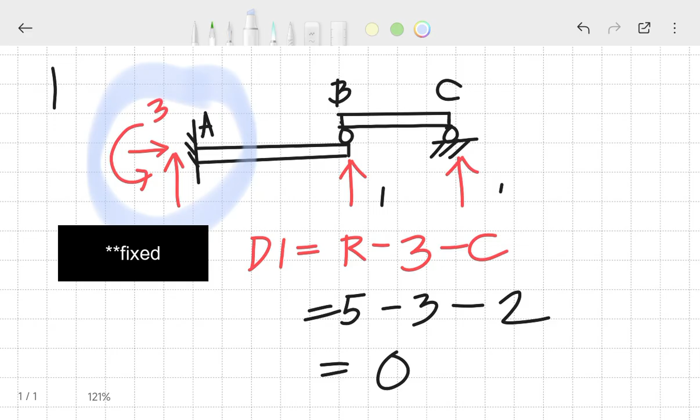So this is practice problem number 1. We have here a fixed connection. At the fixed support, there are three reactions because there's X, Y, and moment. At B, we have an internal roller, with one vertical reaction. Then at C, we have another vertical reaction.

If we apply the formula for the degree of determinacy, that should be R minus 3 minus C. Our R is a total of 3, 4, and 5, so that's 5. This remains 3. And the C for an internal roller remains at 2. Please verify that in the table. So 5 minus 3 minus 2 equals 0.

So based on the degree of determinacy, you can say it's determinate. It can be solved using equilibrium equations. But is it stable or unstable? Based on our own understanding of the figure, actually this is an unstable structure. How do we know if it's stable or unstable?

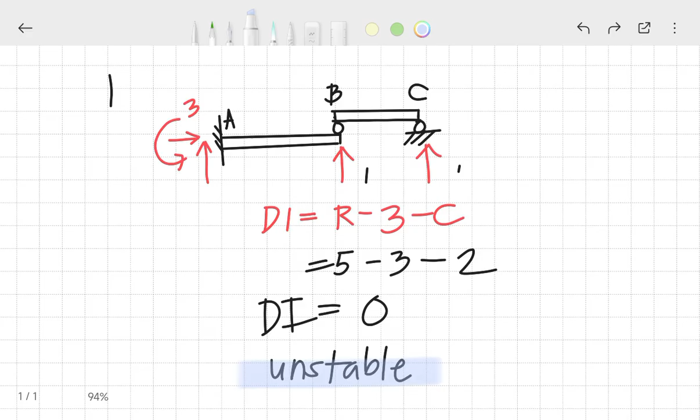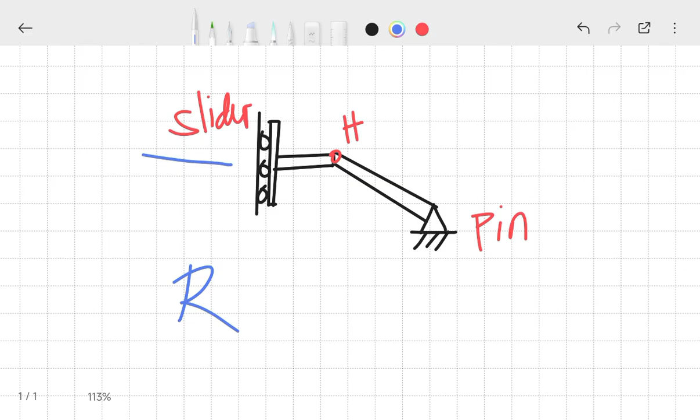So for the next structure, we have a connection of a slider hinge to a pin along the side. If we count the external reactions, for the slider there are always two - one like this, then one moment. So two. At the pin, we also have vertical and horizontal reaction, so two as well. Total of 4 for our R.

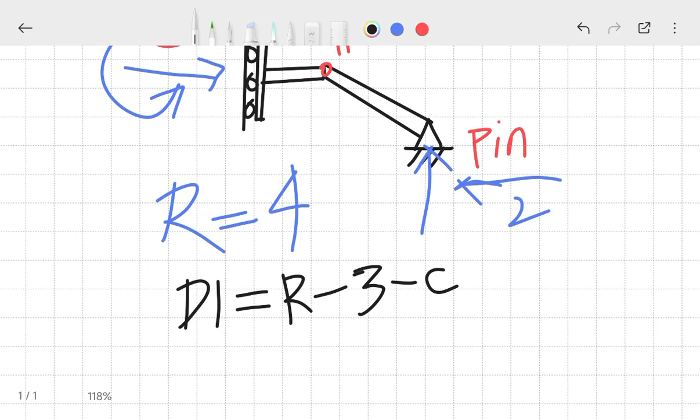What's the formula again? R minus 3 minus C. There's still C, which comes from internal reactions. The C, or the number of releases for a hinge connection, please refer to the table, that is equal to 1. If we put in the given: 4 minus 3 minus 1, that's 4 minus 3 minus 1 equals 0. Or you can say that is a statically determinate structure.

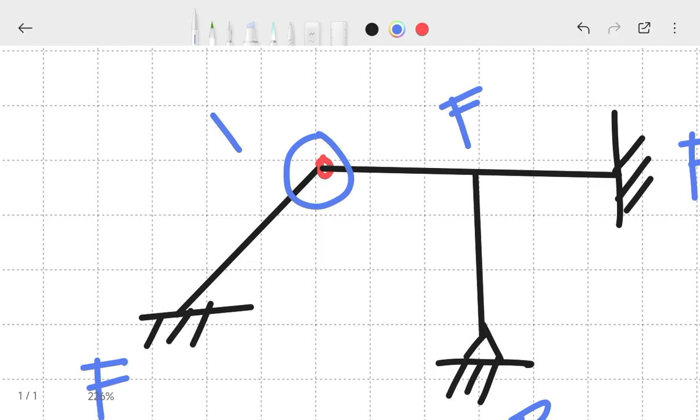Okay, so with these internal and external reactions, let's count the total. For external, we have fixed: 1, 2, and 3 (marked in red). So we have 3 here. External pin, so two. Then fixed again, so three. So R total is 3, 6, 7, 8.

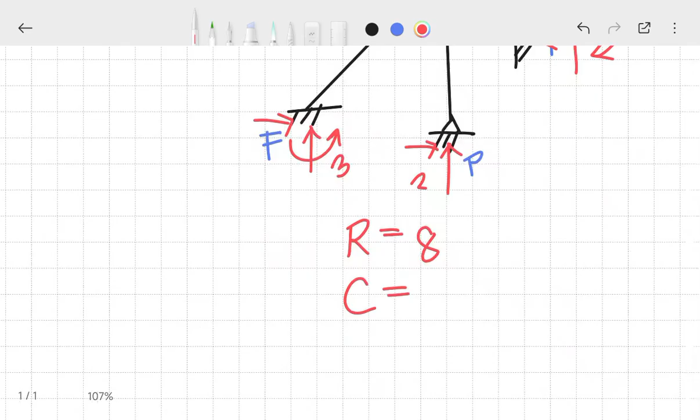C po natin, we have an internal hinge. So ang hinge is may 1 na C. Tapos yung para sa fix, wait, refer ko dun sa table, wala siyang releases, so total mo lang dyan sa row. Kaya pag lagyan natin siya dun sa DI, magiging R minus 3 minus C, equal sa 8 minus 3 minus 1, tama ba? Or 8 minus 4, that's 4. So meron pa pong 4 degree of indeterminacy, statically indeterminate up to the 4th degree, since mas mataas po yung nakuha natin.

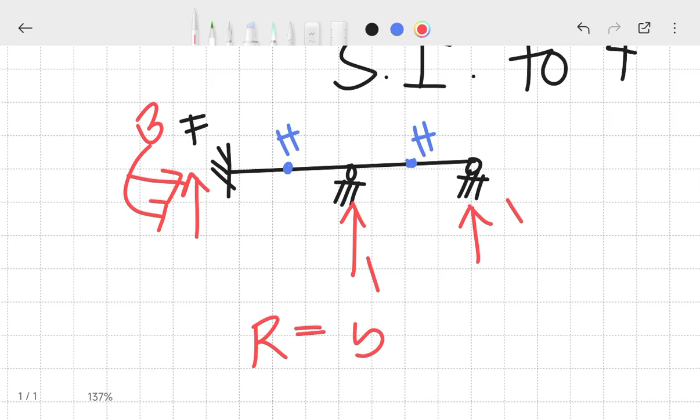Tapos meron po siyang internal hinge sa gitna-gitna, may hinge na dito, may hinge ka rin dito. So kung i-analyze po natin, reactions na muna: 1, 2, and 3, so we have 3 reactions. We have 1 reaction sa roller, 1 din dito, so total of R is equal to 3, 4, and 5. Yung C po natin, dahil meron po tayong hinge, ang C po ba ganyan, lagi namang 1, so 1 and 2. So sa kaso na yan, pwede na tayo maglagay ng formula DI equals R minus 3 minus C. R po natin, 5. 5 minus 3 minus 2, or 5 minus 5, 0.

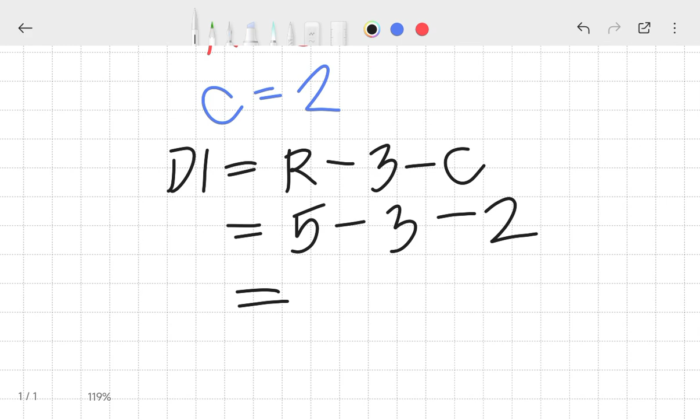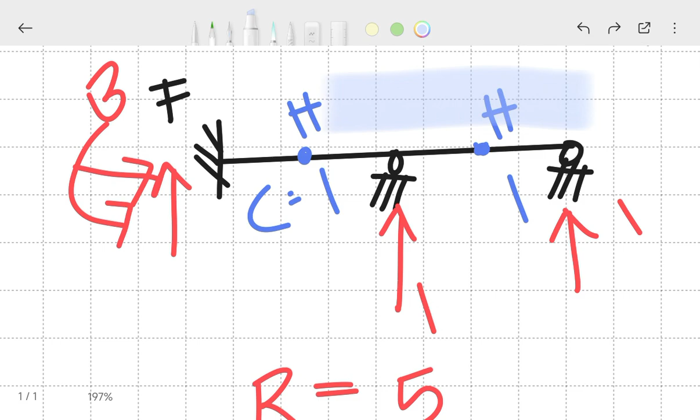Kung nag-0, ibig sabihin that is statically determinate, or SD. Kung i-analyze mo po, maayos naman po yung pagkakakabit ng mga suporta dito sa ating beam, sapagkat meron naman siyang sumusuporta dito, naka-fix. Kaya kahit mag-slide down tong mga roller na to, hindi siya mawawala sa pwesto. Kaya statically determinate po, at masosolve po siya using equilibrium equations.

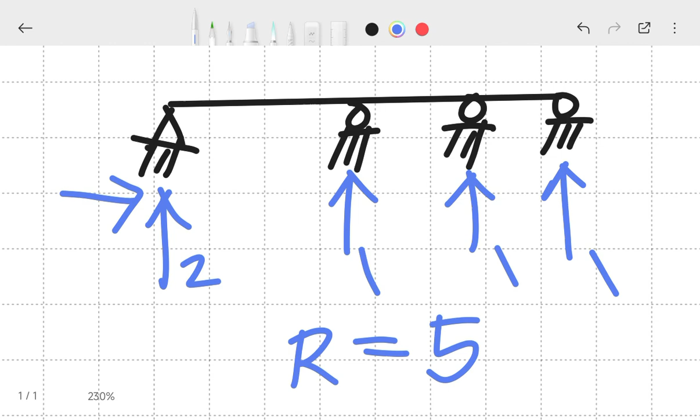Ito naman, so meron tayo ditong continuous beam na merong pin, so dalawa ang reaction mo dyan. Tapos roller, roller, and roller, so total, tigi-isa, ang reactions po natin ay 2, 3, 4, 5. Do we have an internal hinge? Wala naman siyang sinabi na internal may hinge sa pagitan, kaya wala po tayong consider na releases. So C po dyan equals sa 0.

So pag nilagay natin nun sa formula, DI equals R minus 3 minus C. Magiging 5, tama ba? 5 minus 3 minus 0. So 5 minus 3 is 2 degree, so meron pa rin po siyang indeterminacy na 2 degrees. So pwede pong masabi na statically indeterminate po siya up to 2 degrees. Yan po ang kasagutan sa problem na iyan.

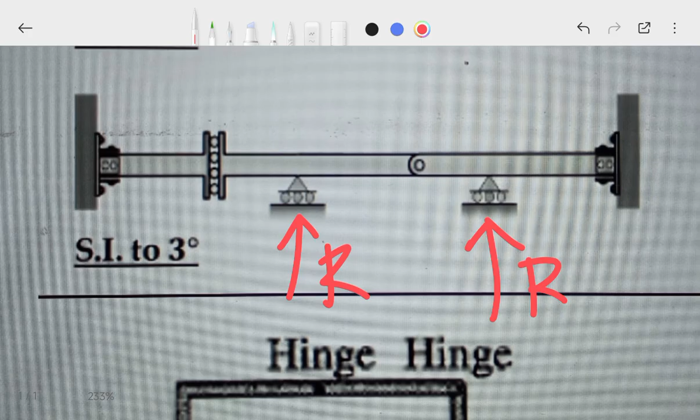Next na po natin, ito po, so for this particular problem, in-screenshot ko siya kasi medyo complicated yung figure. But as you can see, that is a continuous beam with so many connections. Nakakaloka. Unahin natin yung external, so ang assumption ko dito, ito, roller ito. Oo, malamang roller man talaga yan. So ilan ang total reactions niyan?

Tig-isa. Okay, tapos ito, ang assumption natin, fixed siya, no? So pag fix, tatlo dapat ang reaction. Bakit fixed? Kasi pag titignan mo, nakabultahin naman siya dito, tapos ano din siya dyan, so fixed yung connection. So we have here 1, 2, and 3, tama ba? Tatlo, isa. Tapos dito din, tatlo din, kasi fixed din yung assumption natin. So for a total of R: 3, 4, 5, 6, 7, 8.

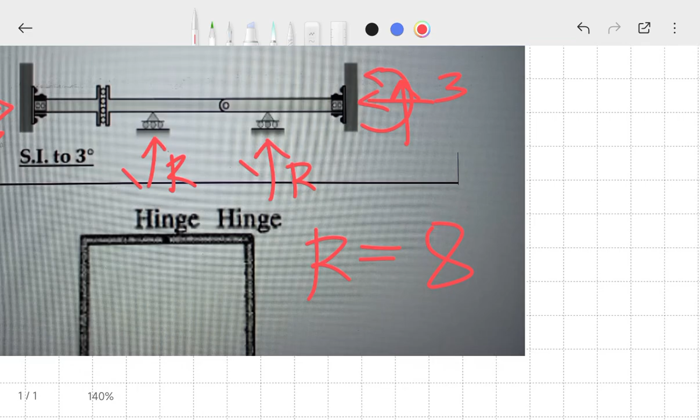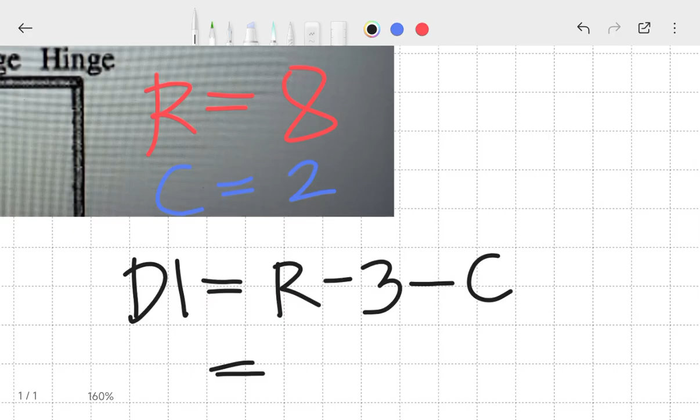8 yung R. Sa C naman po, makikita natin sa internal reactions. Ang internal po ng slider, paki-refer po sa table po natin, ang slider po ay mayroong internal na C equal to 1. Tapos ang hinge is C equal to 1 din, so total of 2, C is 2. So pag nilagay na natin siya sa formula ni DI, magiging R minus 3 minus C, so that is equal to 8 minus 3 minus 2, ilan? 8 minus 3, 5 minus 2, 3. Okay, so 3 degree po yung indeterminacy niya, which is nandun sa module, yun sa dual. SI po siya to the 3rd degree.

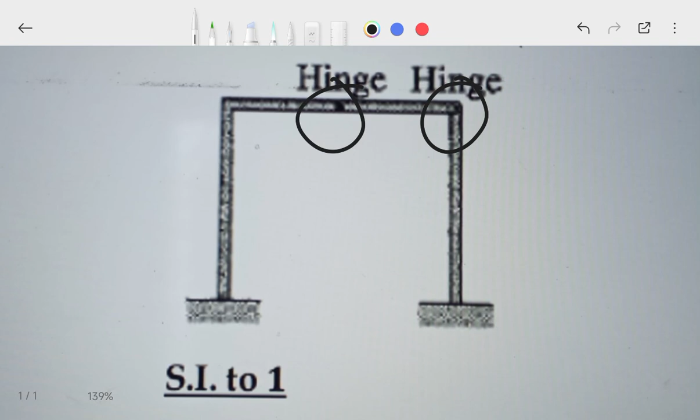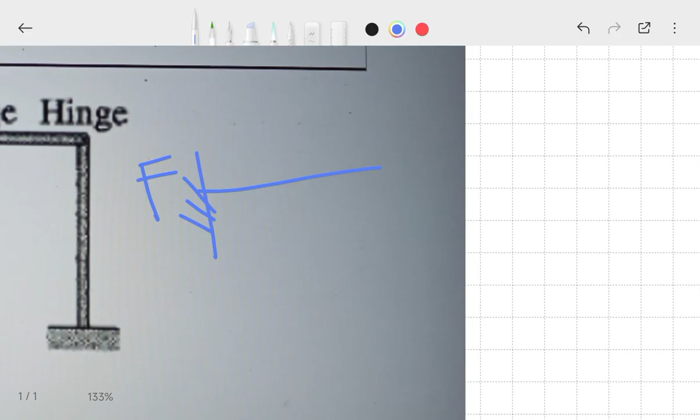Itong next problem po natin, meron tayong fixed na frame, fixed kasi ito, no? Tapos meron po siyang internal hinges along this, tapos ito pa pala, that is fixed. Diba, ang analysis natin sa frame, para lang din natin yung pinapahiga, so beam, kasi as you can see, meron siyang 1, 2, and 3, tatlong sangay. So kung gagawin mo siyang horizontal lahat, so ito yung fix, tapos ito yung first part, tapos fix din siya dyan, or something. Tapos bali dito sa gitna, magkakaroon pa siya dyan ng hinge, tapos dito may hinge, tapos fix na yung dulo. Ganyan bagang analysis natin sa mga internal reaction ng frames. But okay, anyway.

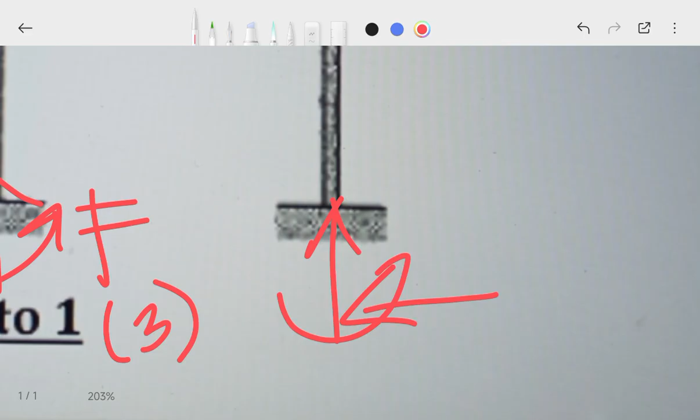If we count externally the number of reactions, here we have three because there's a fixed moment. So it should be 3. Then over here also fixed, so 1, 2, and 3. So fixed, three. How about the external total? So R total is 6.

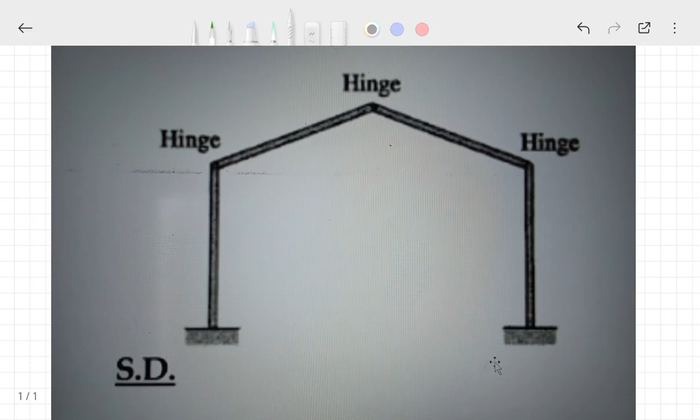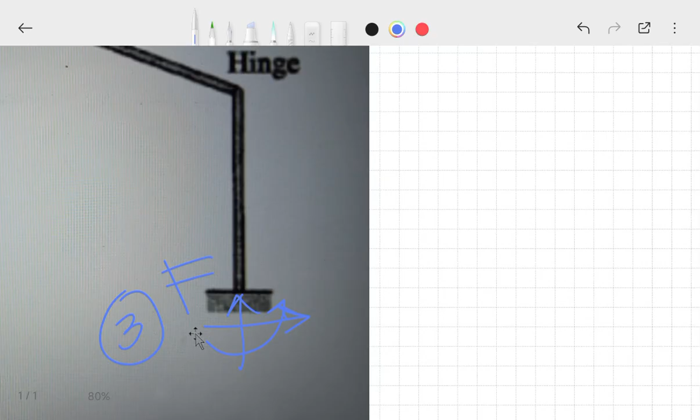For our next problem, we have another frame system that is fixed at the bottom, as you can see here. Then here, also fixed. Then it has three internal hinges inside. Let's do the external first. So it's fixed, so we have, in blue, three external reactions for a fixed connection: 3. Then here, also fixed on the other side, so 1, 2, and 3. Total of three as well. If we sum it up, we have R equals 6 for external.

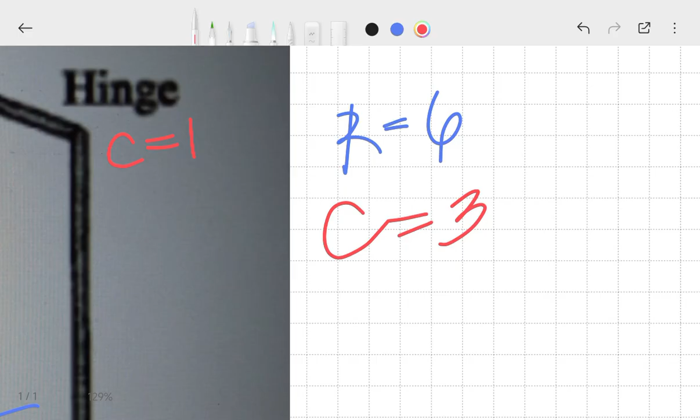How about the internal? So internal, we have hinges. How many hinges again for C? So 1 C for the hinge. At C, 1 again. Then here too, we still have C equals 1. So total of C's, we have 1, 2, and 3. So let's apply to DI: R minus 3 minus C. So that should be 6 minus 3 minus 3, or 6 minus 6 equals 0.

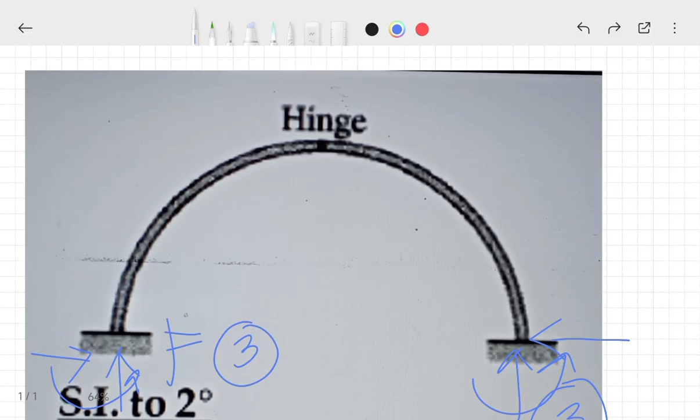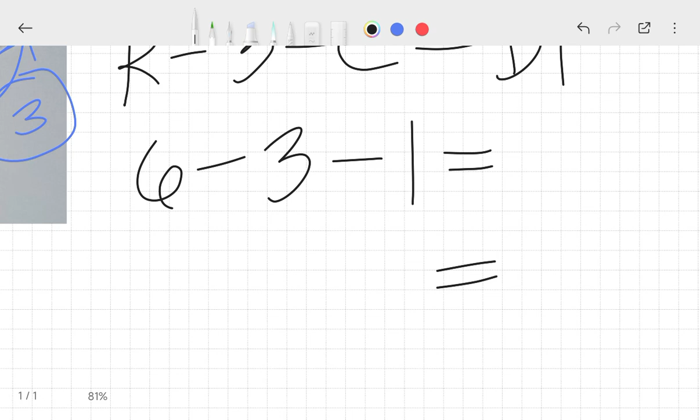Okay, so total R, that should be 6. Total C, 1. So R minus 3 minus C, that is our degree of indeterminacy. We have 6 minus 3 minus 1, or 2 DI. So 6 minus 3, that's 3. Minus 1 more, so 2. Right? 2 degrees of indeterminacy.

So therefore, this structure is statically indeterminate, 2 degrees only. Which is evident because it's indicated in the problem itself. You can follow along.

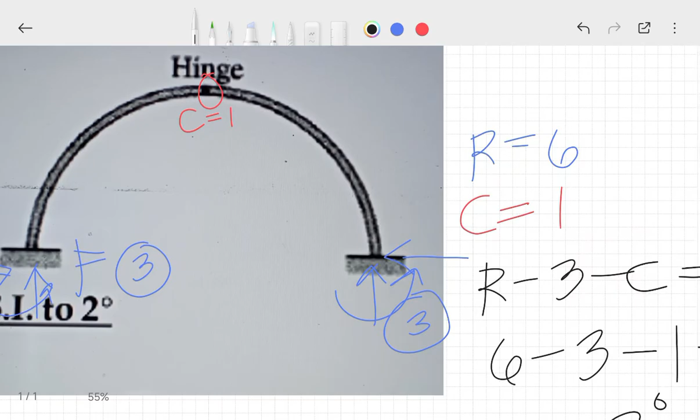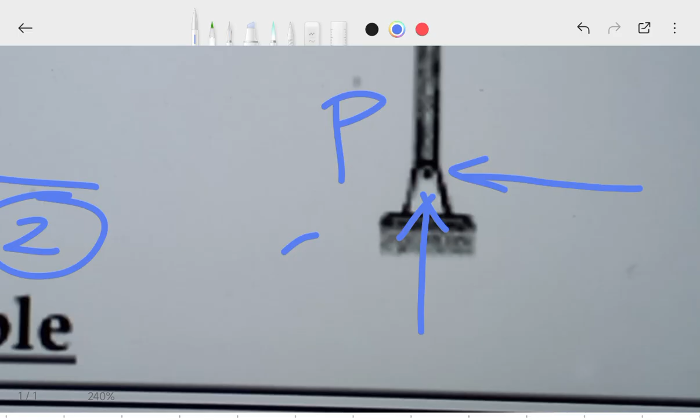For this problem, we have a frame system supported by a pin connection here at the bottom. So if it's a pin, then you have two reactions there. Same here, because it's also a pin. A total of 2. So our total reaction, 2 plus 2, 4.

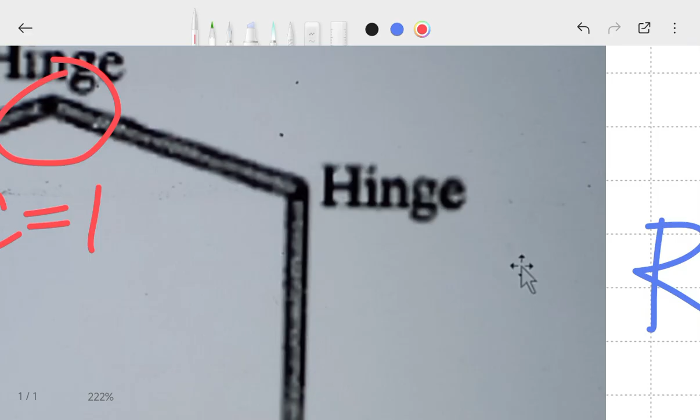So when we plug it into the indeterminacy formula, R minus 3 minus C, how much is R? 4 minus 3 minus 2. So that is negative 1. So negative. Our determinacy became negative.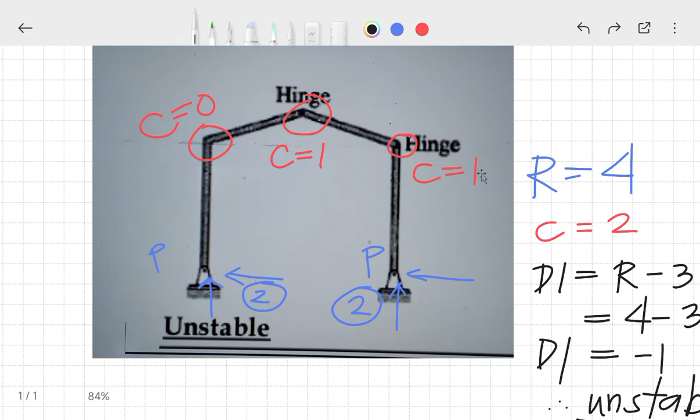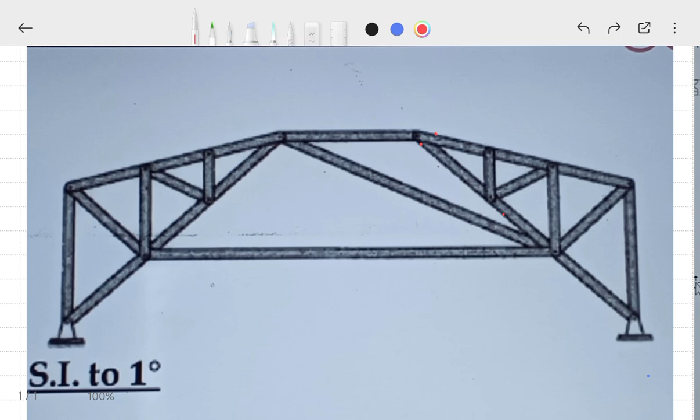For this problem, we have a truss system supported by a pin connection and connected by several hinges along the frames. Let's analyze by first looking at the external reactions. Since this is a pin, there are two reactions on the left and two on the right, since it's a pin connection.

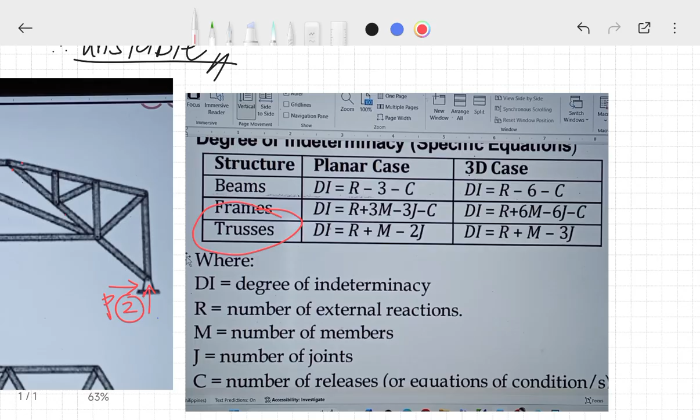Take note, the formula for degree of indeterminacy is slightly different here. For beams, we use R and C, and for frames, we use a similar method. So the formulas are almost synonymous. However, for trusses, the formula we follow is DI equals R plus M minus 2J. R is still the reactions, M is the number of members, and J is the number of joints. That's what's added.

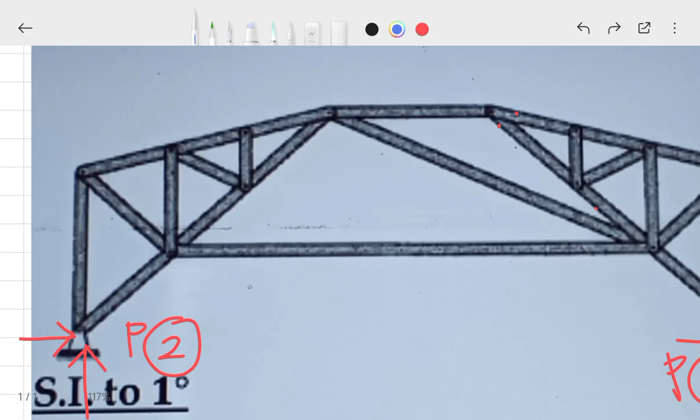For the number of members, we have no choice but to count them one by one. Counting: 1, 2, 3, 4, 5, 6, 7, 8, 9, 10, 11, 12, 13, 14, 15, 16, 17, 18, 19, 20, 21, 22, 23, 24, and 25. So our M is 25.

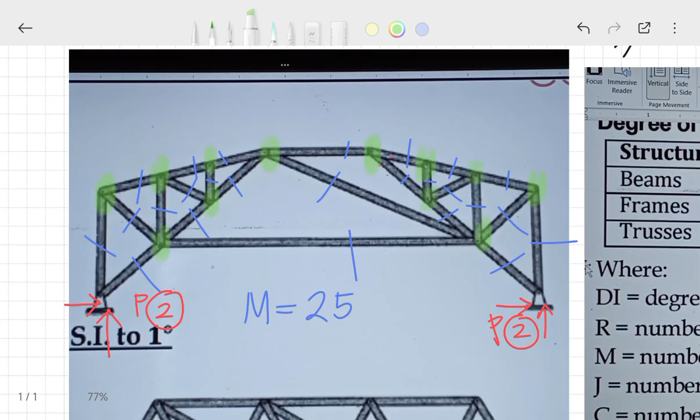Then for J, the number of joints, let me change the color. Let's count: 1, 2, 3, 4, 5, 6, 7, 8, 9, 10, 11, 12. Is this included in the count? Let's assume it is for now. 13 and 14. So for joints, we have J equal to 14.

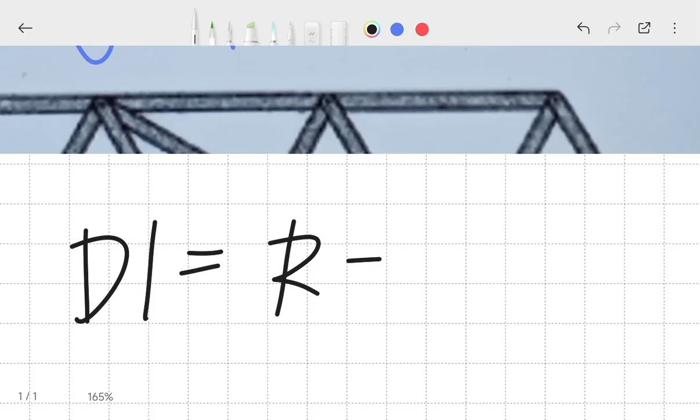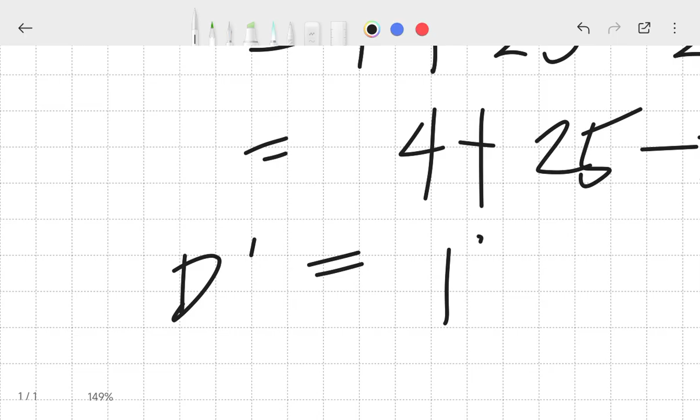Let's try it, trial and error. DI equals R plus M minus 2J. This is the formula we'll use. We have reactions equal to 4, plus M which is 25, minus 2 times J which is 14. Using the calculator, that's 29 minus 28, which equals 1. There's an excess of one, so the degree of indeterminacy is statically indeterminate to 1 degree.

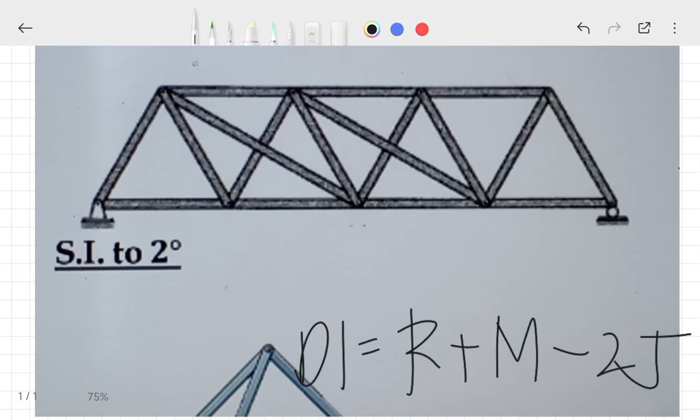For this problem, still trusses, but as you can see, it's simply supported. Let's start with the reactions so it's faster. You have a pin connection, so two reactions there. Then on the other side, this is a roller, so one reaction there. So the total R is 3.

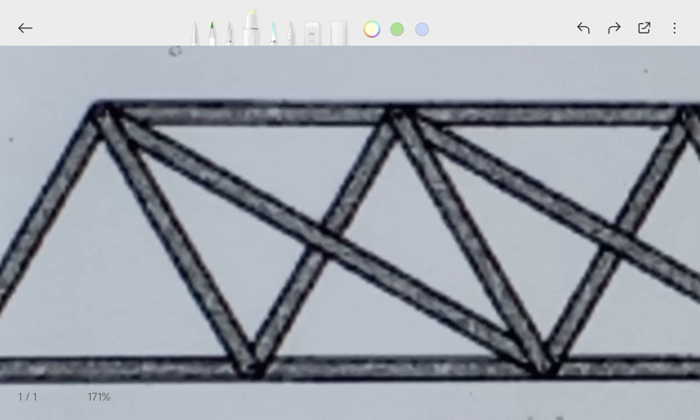Okay, let's count one by one: 1, 2, 3, 4, 5, 6, 7, 8, 9, 10, 11, 12, 13, 14, 15, 16, and 17. So there's a total of 17 members. M equals 17. Then how many joints?

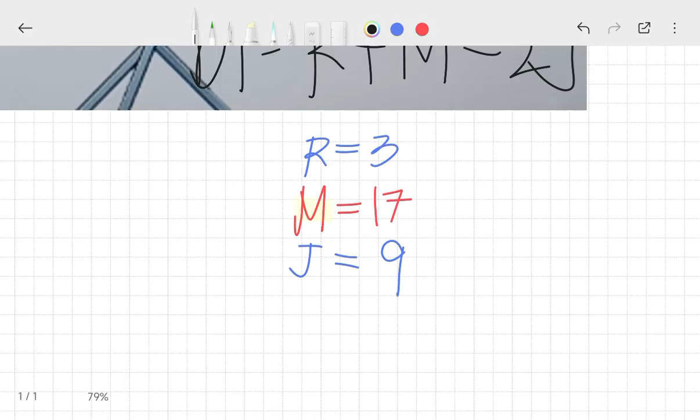Applying this to DI: R plus M is 3 plus 17, minus 2 times 9. Mathematically, that's 20 minus 18, so the result is 2. So it's still statically indeterminate, up to 2 degrees only. That's correct, so that's the solution.

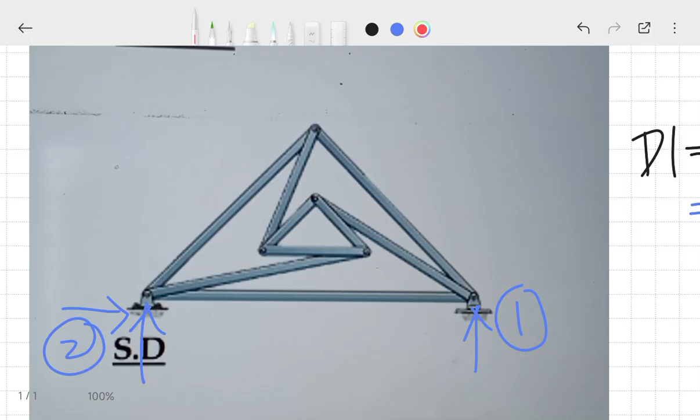Is that correct? And how about the joints? Let's count: 1, 2, 3, 4, 5, and 6. Just 6? That's correct, right? Just 6, so it's 6.

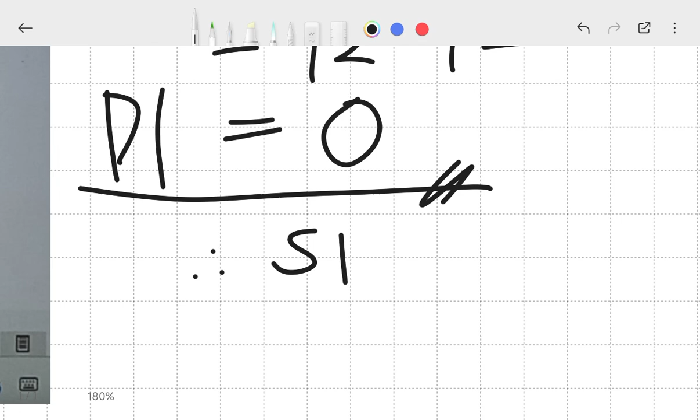Minus 2 times 6. So the total becomes 9 plus 3 is 12... minus 12. That's perfect, so the DI equals 0. Therefore, that is statically determinate, which matches the expected SD answer. Okay, so yeah, right?

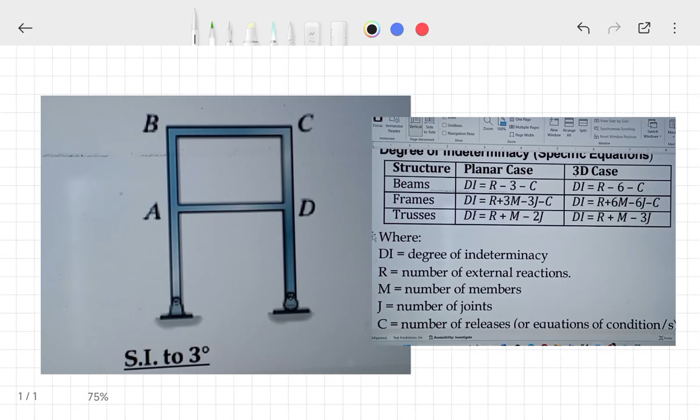Ito naman po, frames, no? Kasi combination na siya ng vertical and lateral. Ayan, so ang gagamitan natin formula, paano ba yan? Overlap ba yung edge? Ayan, buksan ko lang.

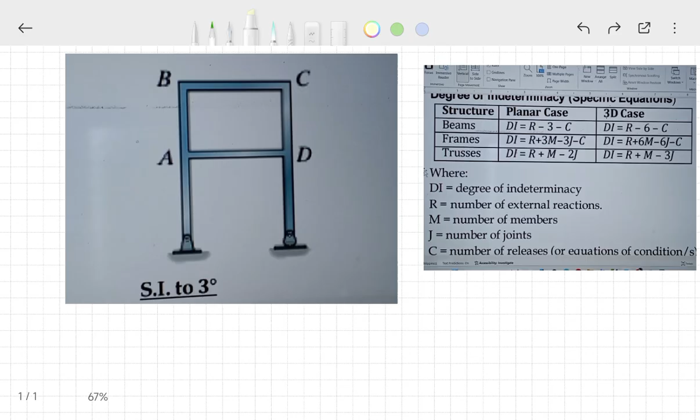Ito po ang gagamitan natin na formula for frames: DI equal to 3M plus R minus 3J minus C. So kagaya lang din sa trusses, bibilangin lang natin dyan yung number of members, number of joints. Pero combination na siya nung nasa beam, na mahanap tayo ng releases, the equations of conditions, okay, for the internal reaction. Sige, madali lang naman yun, para lang combination ng beams and trusses all over again.

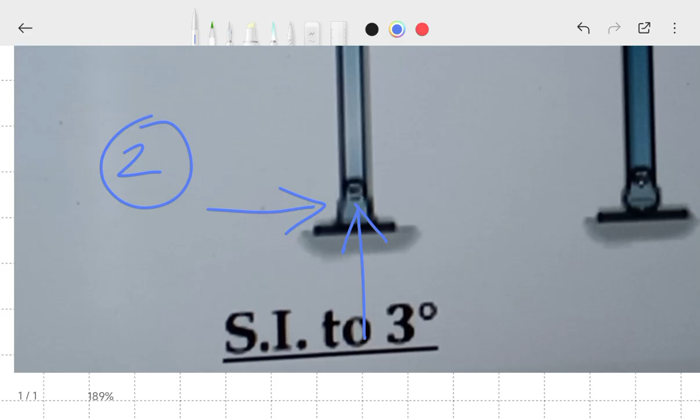So sa reactions po, unahin na natin yung medyo madali-dali. So this is pin connection, so meron tayo dyang dalawa. Tapos dito, rocker, so rock and roll, isa. Total R,

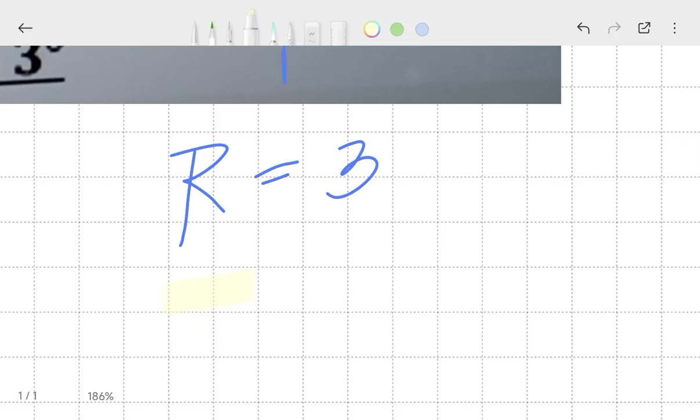3. Then ang panggamit natin, M, number of members. So paano ba natin ito bibilangin? I think we will have an assumption. Ito yung ground floor, so member 1, 2, 3, 4, 5, and 6. Tama? So sa members po, gawin na po natin sila 6. Then for the number of joints, so kung nasaan nag-intersect yung mga members na yon, so 1, 2, 3, 4, 5, and 6. So sa number of joints, 6.

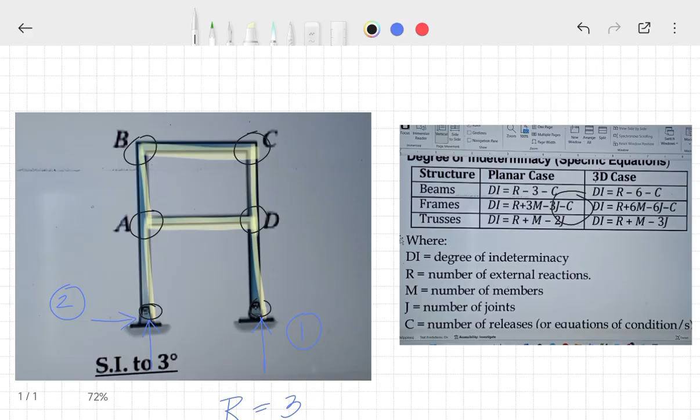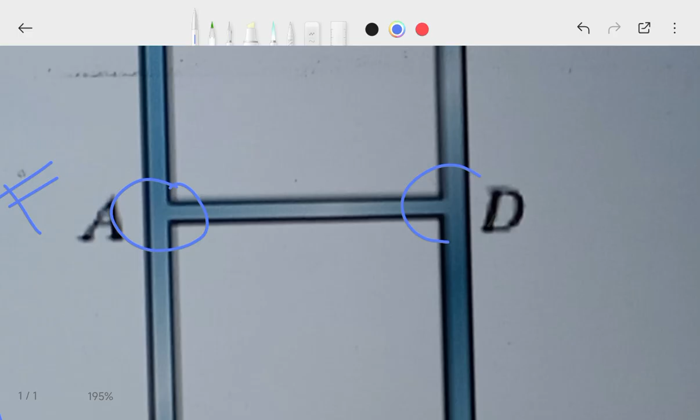Ito yung medyo bago sa analysis, yung C. C nga po ay lagi yung number of releases ng kada section or ng internal reaction. So kung mapapansin nyo po, pwede bang erasing ko na to para highlighted ulit. Ayan, kung mapapansin mo po dito, may internal fixed connection siya, no? Parang sa columns and beams, diba, ang columns naka-fix, saka sa beam naka-fix. So fixed siya, ito din, saka ito din. So fix and fix, so meron tayo dyang 4 na fixed connection.

Sabi, diba, ang fixed connection, ilan ang releases? So balik lang tayo dun sa table. Okay. For internal fixed, that is 0 known conditions. So wala rin naman pala tayong releases at any part, kasi nga may moment dun lahat, may internal reaction, may moment.

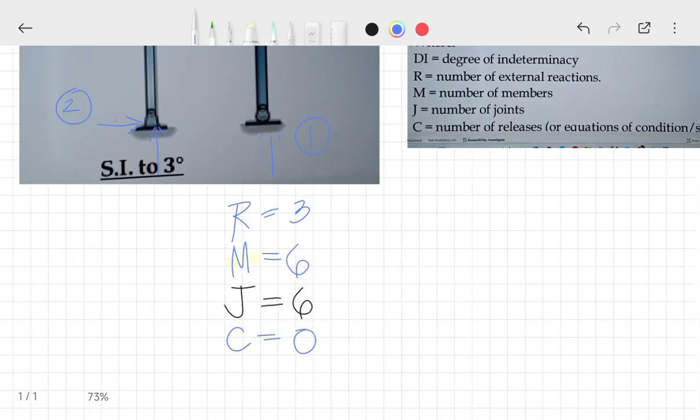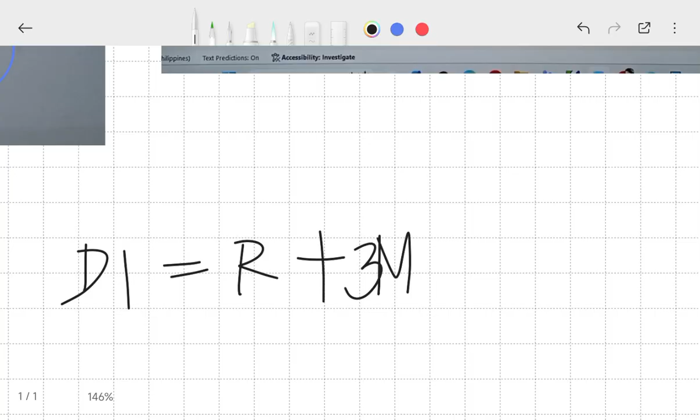So nilalapat po natin to sa formula: R plus 3M minus 3J minus C. So R po ay 3, plus 3 quantity M is 6, minus 3 times J po natin 6, minus 0. So ilan yan? 3 plus 18 minus 18. So cancel, matitira 3 degrees. So statically indeterminate po siya to the third degree.

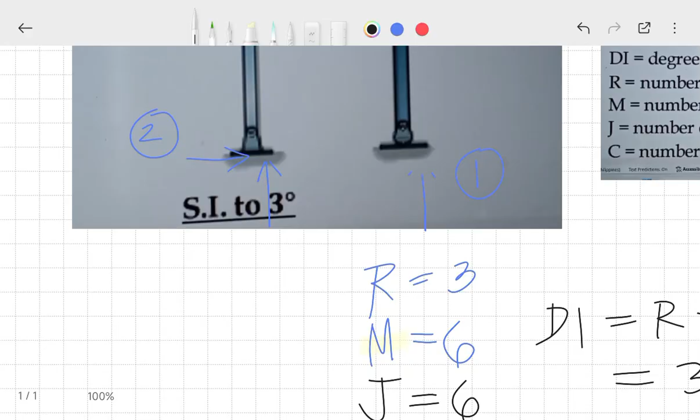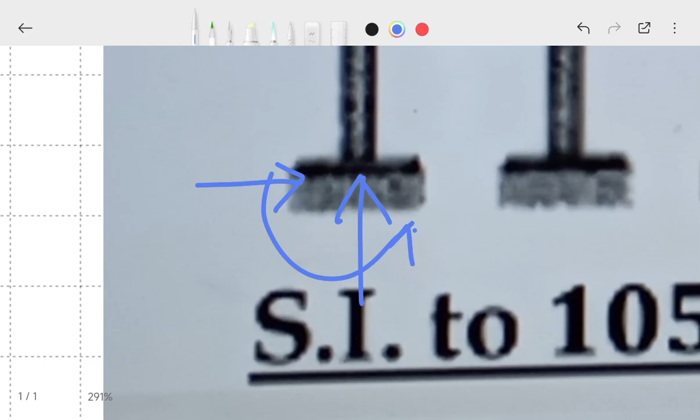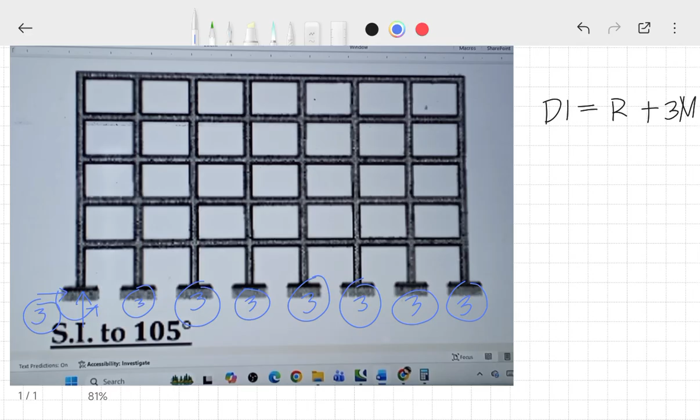So ito po lahat fixed yan sa ilalim, just like the usual, 1, 2, and 3. So sa kada poste, may 3 reaction. So 3, 6, 9, 12, 15, 18, 21, 24. Bali, 8 poste. Ano ba? 1, 2, 3, 5, 6, 7, 8. So total reaction, 8 times 3, or 24.

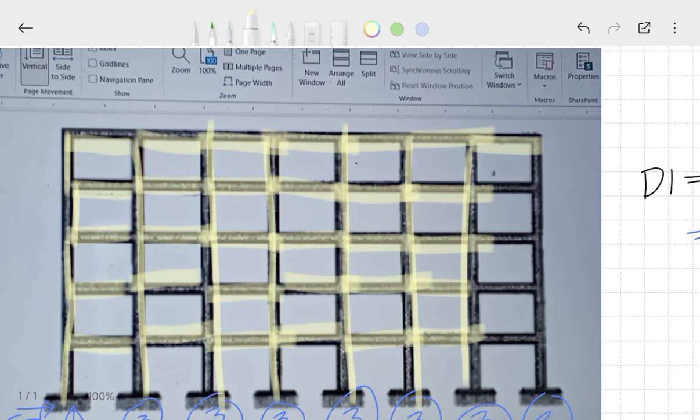Sunod, number of members, dito ka malulula, napakarami nito eh. So members, we have 1, 2, 3, 4, 5, 6, 7, 8, 9, and 10. So 10 times mo na lang siguro kung ilan yung plus 3 by 10 by ilan yun, yung sanga. So we have 1, 2, 3, 4, 5, 6, 7. So 7 na ganito. Tama? So that's already 70.

70. Plus, add ko pa yung dulo. So 1, 2, 3, 4, and 5. Siya. So 70, 75.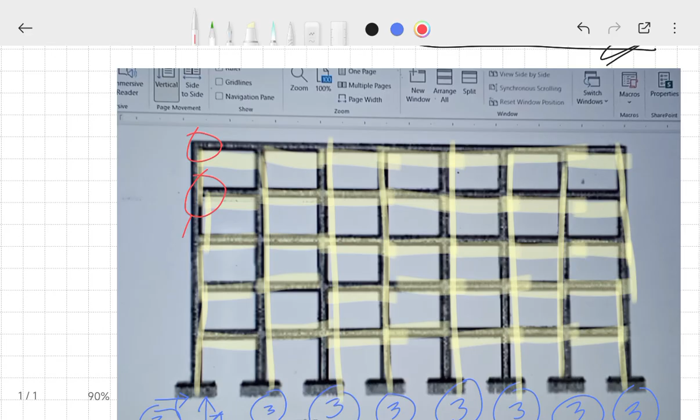Tapos yung minus 3 by how many joints are there? So 1, 2, 3, 4, 5, and 6, times 8. So 6 times 8, 48. Minus ilan ang number of releases. So since all of those are fixed, I think 0 naman ang releases of fixed numbers. So wala na siyang isasama din.

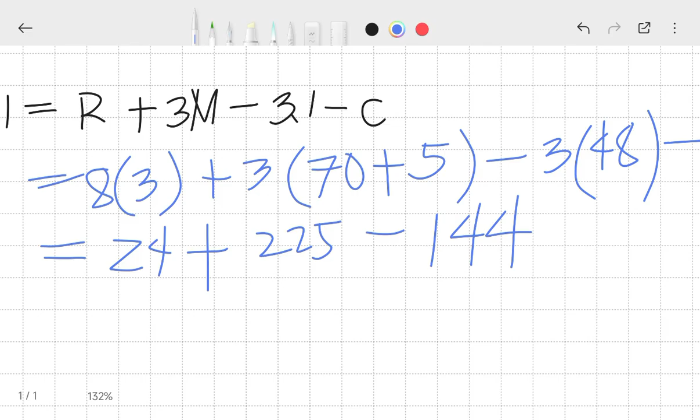Paki-ano na lang po yan, bali 8, 16, 24 plus 75 times 3, 225, minus 3 by 48, 144. So 24 plus 225 minus 144, 105 degrees. Inay, good luck naman kung paano mo yan i-ano, diba? So statically indeterminate po siya at 105 degrees. So yan po yung sagot.